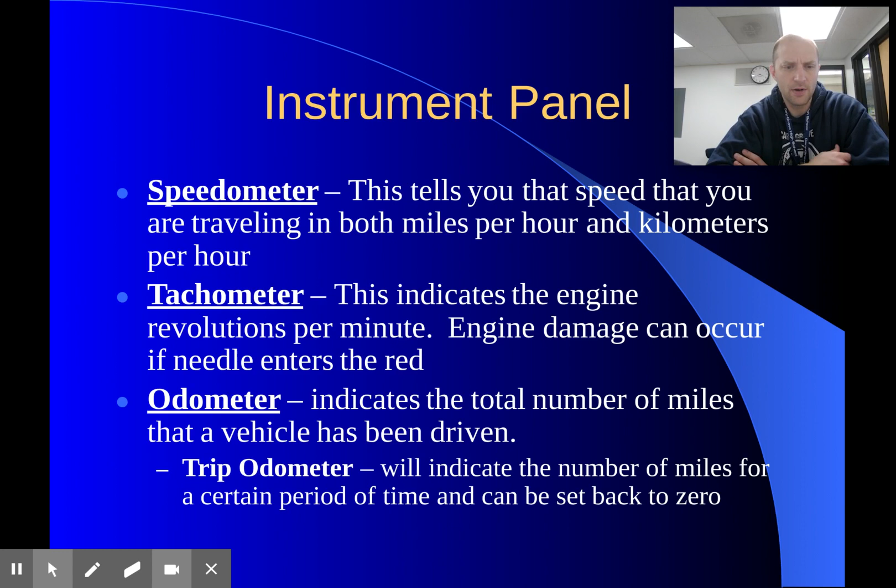Fuel gauge, you guys know, keep the fuel gauge up. If you look at the fuel gauge, you'll notice there's a little arrow there, and that tells you where the gas cap is. So if you're trying to fill up, take a look at the arrow. I'll show you in one of the next slides here.

The temperature gauge light warns you when the coolant in the engine is running too hot. If you have a leak of some sort, you might see your temperature gauge getting into the red zone, and that is bad. If you see that, you want to turn your engine off, or at the very least turn your heater on, and that's going to help expel some of the heat out of the engine compartment.

The oil pressure gauge light warns you when there's not enough oil circulating at the proper pressure. Usually that's because your car might be older and it's burning oil, or maybe you're past due for an oil change and you've lost some oil along the way, or maybe you have a leak. So take a look at those gauges. If you see some warning lights, get that fixed right away, because that's going to cost you thousands of dollars if you don't and something goes wrong with the engine.

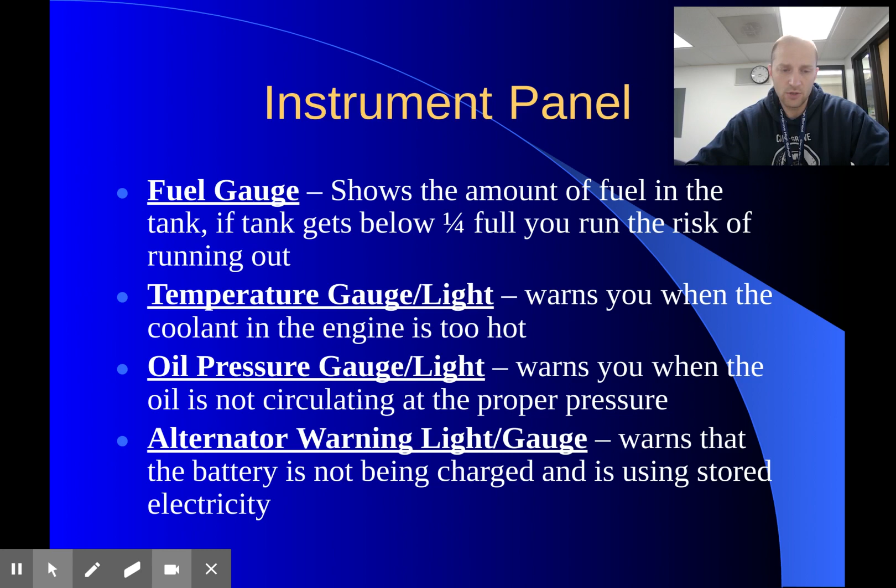The alternator warning light gauge warns that the battery is not being charged and is using stored electricity. Anytime you start your car, that's only with the battery. Once you get the car going, the alternator runs and charges that battery. If there's an issue and it's not being charged, then you're only using the battery, and eventually you're going to run out and have to get your car jumped and get a new battery or new alternator.

Brake system warning light reminds you to release the parking brake and warns you that the braking system isn't working properly. The first thing is, especially when doing uphill and downhill parking, we use the parking brake. If you have a manual transmission or stick shift, we'll talk more about this later.

You always use the parking brake anytime you park to make sure it's secure. The parking brake is located in a few different spots. Sometimes it's on the side console, you press a button and pull up, and you'll see the red brake light go on. Press down and the light goes off, disengaging the parking brake. You might also see one on the left-hand side that you step on to engage it, and step back on harder to disengage it, and the light turns on and off.

There's an anti-lock braking system light that tells you the ABS is working properly. So if you see the ABS light, that's okay, it's just telling you it's working.

The safety belt light reminds us, and we hear that little chime, ding ding ding. That's newer, within the last 20 years or so. That wasn't like my first car, I never had a light or chime saying my seatbelt was on. So this is a newer thing. It gives us a chime that says, hey, put your seatbelt on. It's a nice reminder.

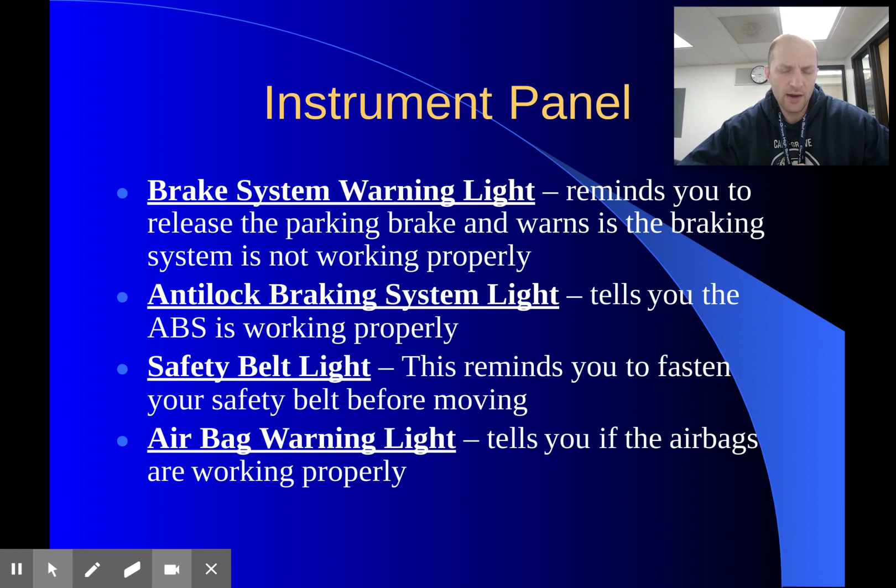And then the airbag warning light tells you if the airbags are working properly.

Turn signals tell you the direction you have to turn the signal. We always know pressing down is the left and pressing up is the right. If you have those on for way too long, usually you'll start hearing chimes, especially like at Three Oaks Road and Route 14 by Thornton's, which is a very shallow turn, not a very sharp turn. So on those shallow turns, sometimes your turn signals do not shut off.

Your high beam indicator is usually a blue light. So when you turn your high beams on, you'll see that blue light glow, telling you your high beams are on. Anytime you're driving towards a car with your high beams on, they can't see, so you want to make sure your low beams are on and your high beams are off.

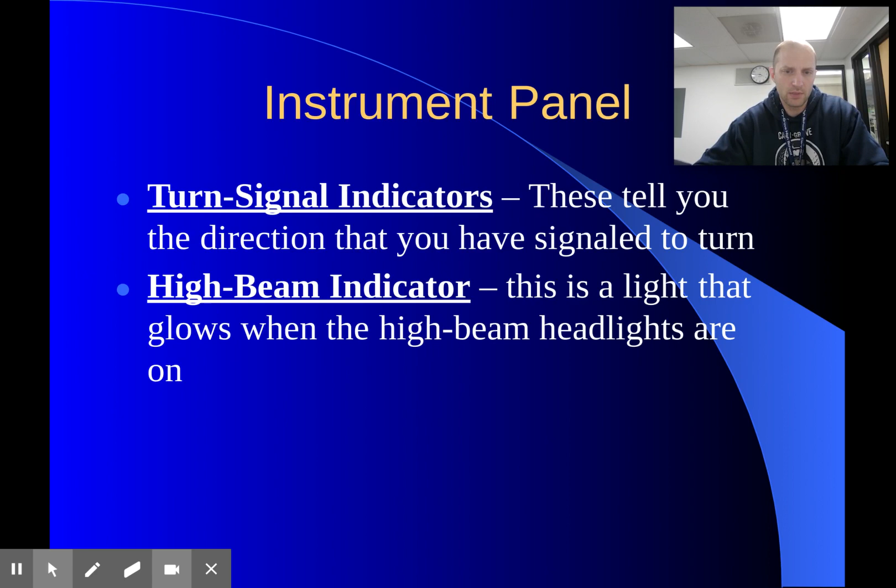So this is just a generic console you can see here. Sometimes they're digital, which is kind of nice. Here we have a tachometer, and here we have a fuel gauge.

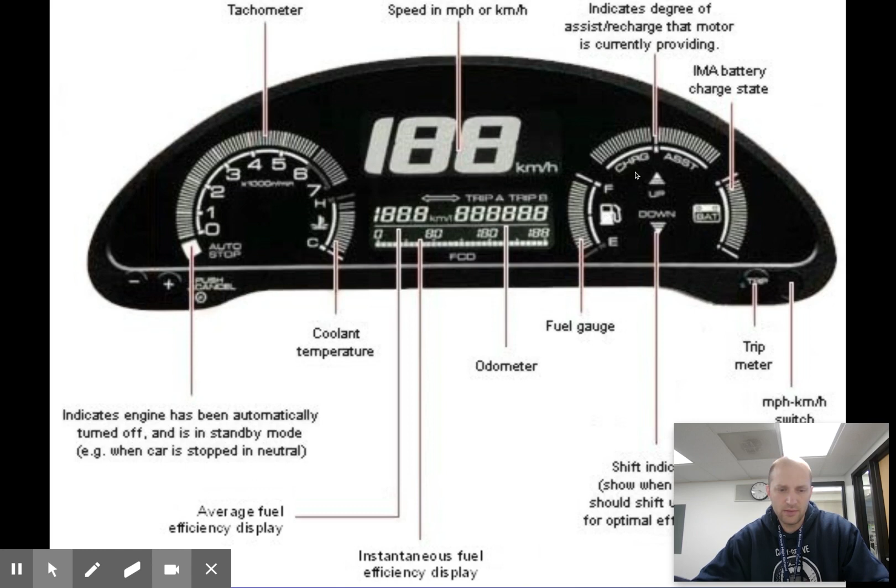The textbook has given us an example to show you the coolant gauge. This is my 2010 Chevy Traverse, it's a little bit older, but it gives you the idea.

Here you see my tripometer, and here is my tachometer. Again, we want those RPMs to be around 4,000, 5,000. If we're getting 6, 7, 8,000, we're really pressing down hard on that engine, and you're going to blow the engine. This is my temperature gauge.

We're going to keep that temperature usually right around 210, which is good. This is my fuel gauge, and you can see that little arrow there by the gas can, telling me my gas tank is on the left, so when I pull up to Thornton's, I know to pull up on the driver's side.

We have our speedometer here. In this case, I just have every 20 miles per hour listed, so every big tick mark is 10, and that's 5, so that's 80, 85, 90, 95, 100.

And these are my gears: park, reverse, neutral, drive, and then L. A lot of people don't know what L is. L is for your low gears, and we'll talk about low gears here in a second.

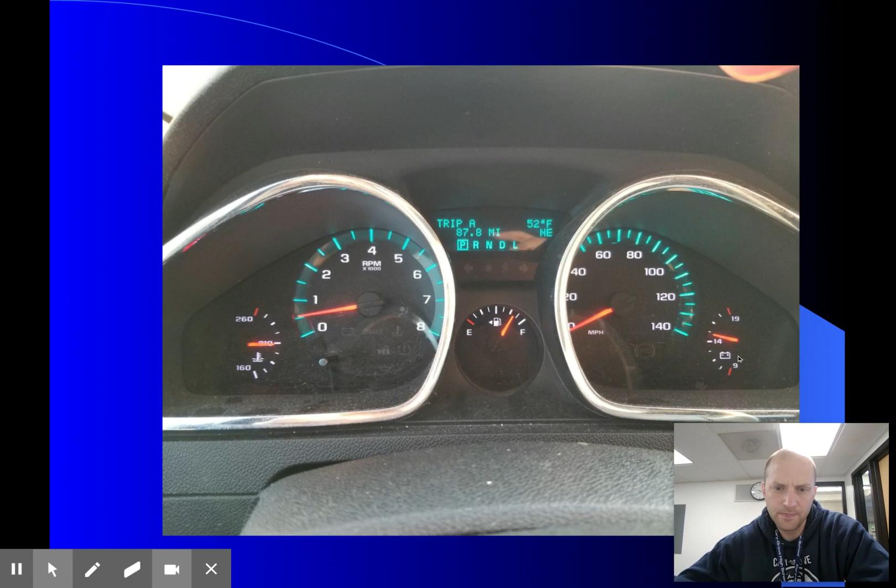This is for my battery, to see that it's charging from my alternator. We know that big round thing in front of me, we should know what that is.

I did have a girl come in and say, what are these pedals down here? Which one's the gas, which one's the brake? She had no idea. And I said, we know what this big round thing is, right? And she said, we know that's a steering wheel. All right, we know how to use that. Make sure when we're using that steering wheel, we're doing little corrections.

We'll talk more about steering in the next few sections. The selector lever in an automatic transmission, that might be, let me move out of the way here.

The gear selector lever location varies for some vehicles. Big trucks and similar vehicles might have it right there on the steering column. Some might have it on the column on the side, or on the center console.

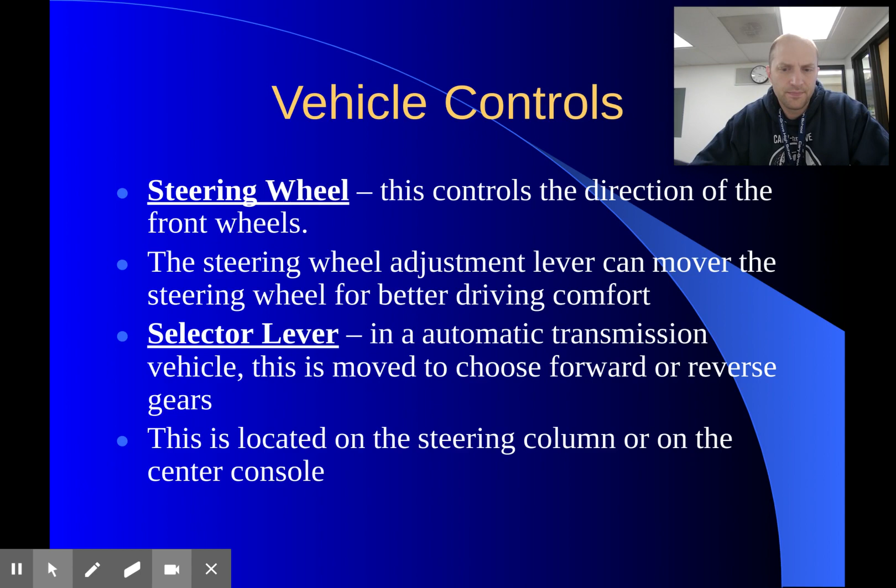The ignition switch is where sometimes we've got to stick keys in and turn it, and sometimes we just press a button.

Cruise control is the device that lets us maintain our desired speed without keeping your foot on the accelerator. We're not going to use this around town, this is for long trips. Maybe you're on the expressway, going from Cary to Florida over spring break, and you've got to be on the road for several hours. You can't just have your foot on the accelerator the whole time, that gets painful after a while.

So when we have enough room around us and there's not a lot of traffic, we go ahead and put that cruise control on, and that's going to maintain our speed. It's really easy to turn off too. All we've got to do is see if cars are starting to slow down, press the brake, and it shuts off the cruise control. It's a good way to maintain your speed, it's good for gas mileage, and it's going to prevent you from going up and down.

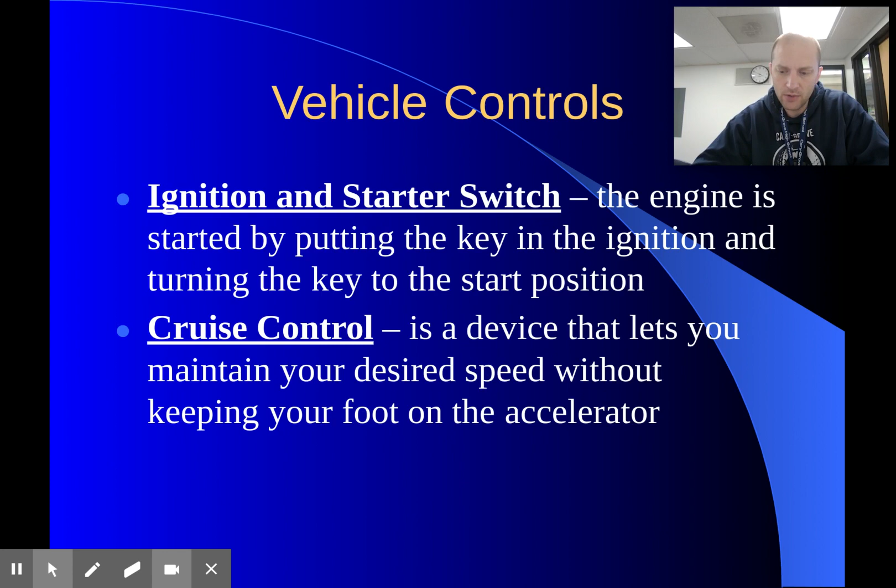Maybe you're not paying attention, all of a sudden you look down and you've been pressing the pedal, and suddenly you're not pressing it hard enough, or you're pressing it too much and you're going 90 instead of 70. So it's nice to maintain your speed, get up to the speed you want to go, and then maintain it. Again, that's really good for your fuel efficiency.

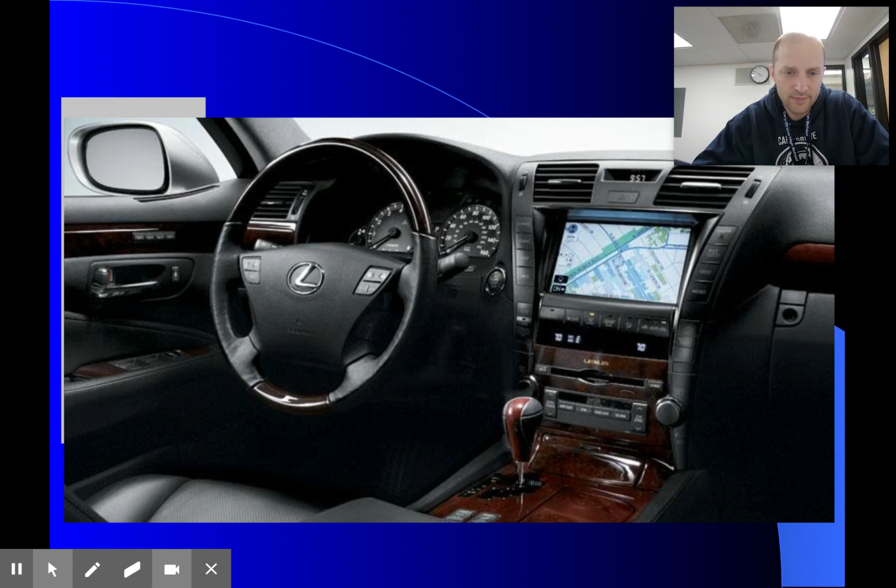Vehicle controls include the parking brake, which keeps the vehicle in place when it's parked. It's located either on the far left of the pedals or the center console. If you have a manual transmission, or what we call a stick shift, you're going to need the clutch pedal, located on the left-hand side of the brake.

We obviously know what the foot brake pedal is, our brake pedal, push this slowly to stop our vehicle. If you ever have to slam on the brakes, we ask you, especially since most of our cars now have ABS, slam on that brake and maintain that pressure. You're going to feel that, that's normal, that's the ABS kicking in. We'll talk more about ABS as we go along.

And then obviously we know the accelerator pedal, pushing this will increase our speed, make us go faster. But be careful, police officers are out there making sure that we are staying within the speed limit.

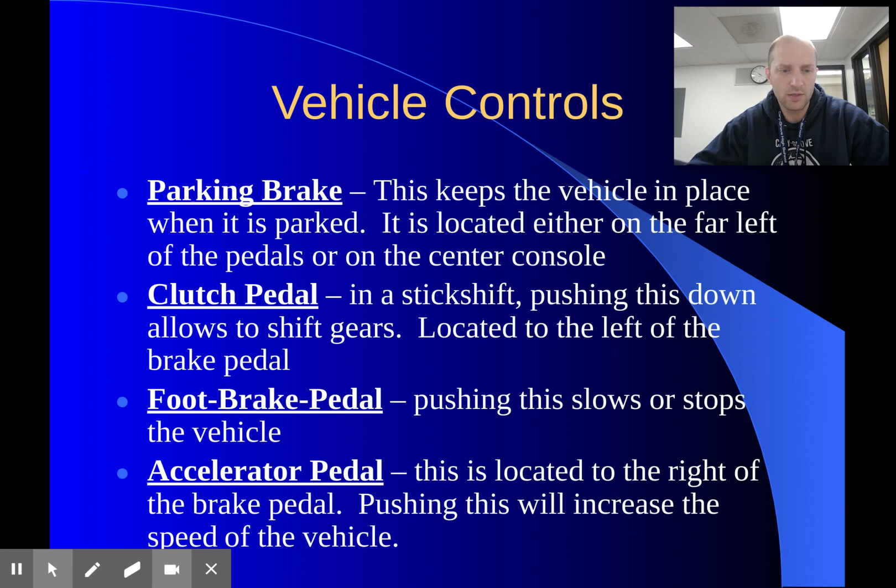Safety belts: always wear that safety belt anytime the vehicle is in motion. A newer thing in the last 40 years is head restraints. Back in the day they would have a chair with no head restraints, and anytime you got in an accident, people would get a lot of whiplash. So the designers of the vehicles noticed that people were having neck issues on even small accidents, so they made the chair go higher so that if you got into an accident, you had support for your neck.

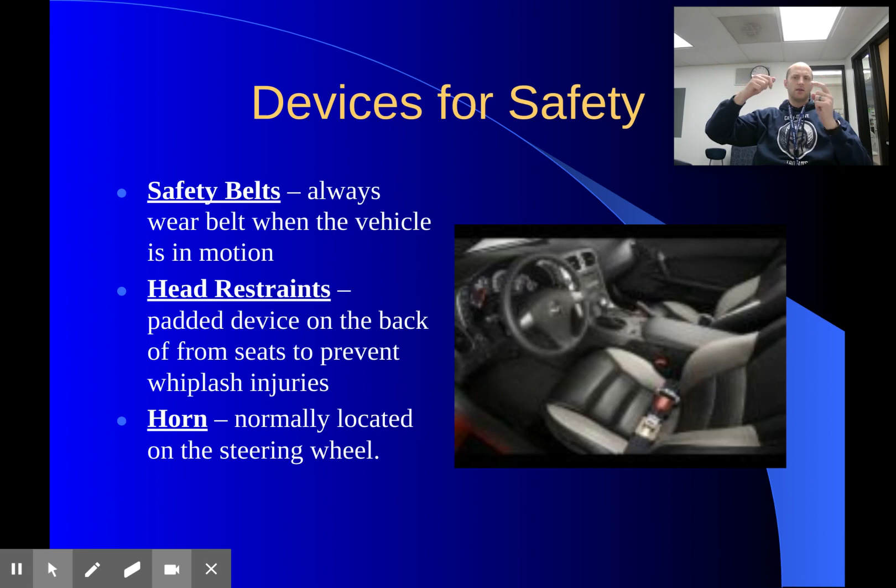One other thing is these head restraints do come out, guys. You'll see these metal prongs, and anytime you need to, you could use them to smash your window to get out of, say, a sinking car. We'll talk more about that in chapter 14.

You guys obviously know what the horn is, press the horn and it gives you a little sound. It's located on the steering wheel. You can use the horn a few different ways: you can be the mean guy and lay on it, or you can be the nice guy and go honk honk, a little double tap.

That's just a nice little, hey, I'm here, versus the big honk. Not so nice.

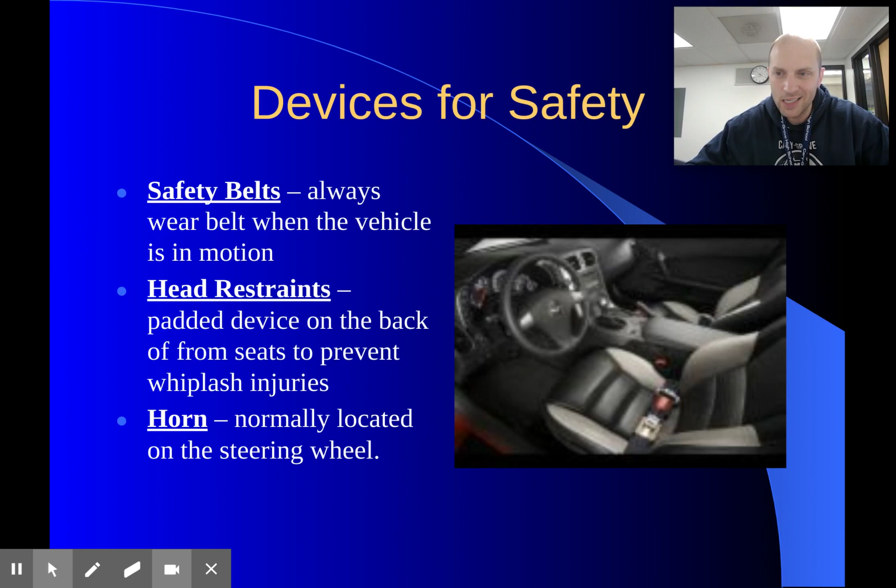We have mirrors on our car so we can see around us the best we can. We have the inside mirror, which shows directly behind the vehicle, and the outside mirrors. Our mirrors are there to help us, but they're not the only thing we can use. We have to make sure they're adjusted to help us see around the best that we can, but know that there are blind spots, and we have to make our shoulder checks from time to time to make sure those are open.

We'll talk more about signaling, checking our mirrors, and checking our blind spots anytime we're changing lanes or moving out of a parking spot.

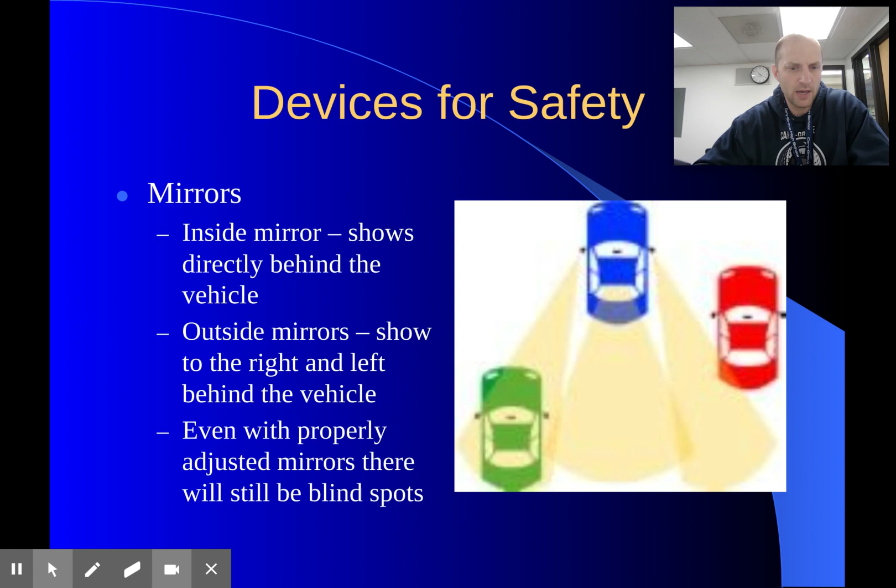There are some outside checks we've got to do before we get ready to drive. Anytime you're approaching your vehicle and getting ready to get in, we strongly suggest you walk around the vehicle and make sure there's no issues. Double check underneath that you're not leaking any oil, make sure your four tires are inflated, and make sure the wheels are pointed straight. You don't want to pull out and all of a sudden find yourself running over the curb. That would be crazy.

Make sure there's nothing on your windshield wipers, and make sure your headlights are in good working order. Especially this time of year, in wintertime, you want to make sure your headlights and brake lights are not covered with snow. We want to make sure those are clear.

Also, ladies, I've seen on Facebook that you should be careful with these predators out there kidnapping women and so on. One of the things they do is put stuff on your windshield wipers, so you always want to make sure those are clear before you start driving. People start driving, get out of their car to check, and somebody's right behind them and takes them. So be aware of that stuff. I've never seen it, but Facebook says it's out there.

So be careful. Now let's do some inside checks. As we're getting ready to drive, we've looked around our vehicle. Now we get on the inside, and we have to be prepared to drive.

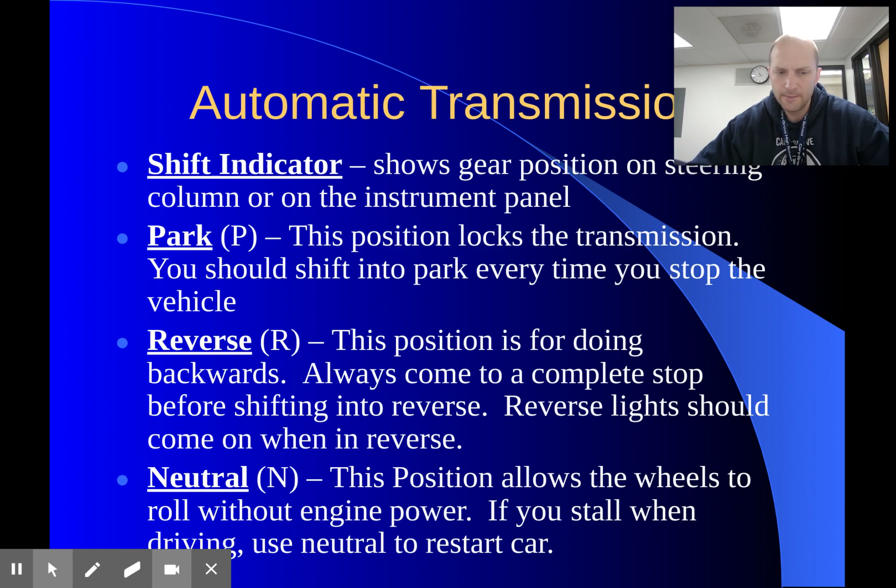Now, some shifters. A lot of us know what these are. P is for park, anytime we're parking the car. R is not because you're a pirate, it's because we want you to reverse, so we go backwards. N is for neutral, so there's no driving power and no engine power, meaning your car will move forward or backward if you're on a hill. And D is for drive. Anytime you guys are shifting, make sure your foot is on the brake before you shift out of park.

Anytime you shift into reverse or drive and let your foot off the brake, you will either go backwards if you're in reverse, or slowly go forward if you're in drive. So we want to make sure our vehicle is not moving while we're shifting. If you put it in reverse and let your foot off the brake, it will start going backwards. And if you put it in drive and let your foot off the brake, it will slowly start going forward. Be aware of that.

The last one is low position, your low gears. You have L1, L2, and these positions allow the engine to send more power to the wheels at lower speeds. This is really good if you have a big trailer behind you, maybe you're hauling a boat or a camper, and you need to get going off the line with a heavy load behind you, or maybe you're moving. You want to put it in the low gears, and that's going to get the car moving a little easier, putting more power to those wheels without spinning them.

Also, maybe you're in the snow and you're having trouble getting going. Put it in a low gear, that should help you out.

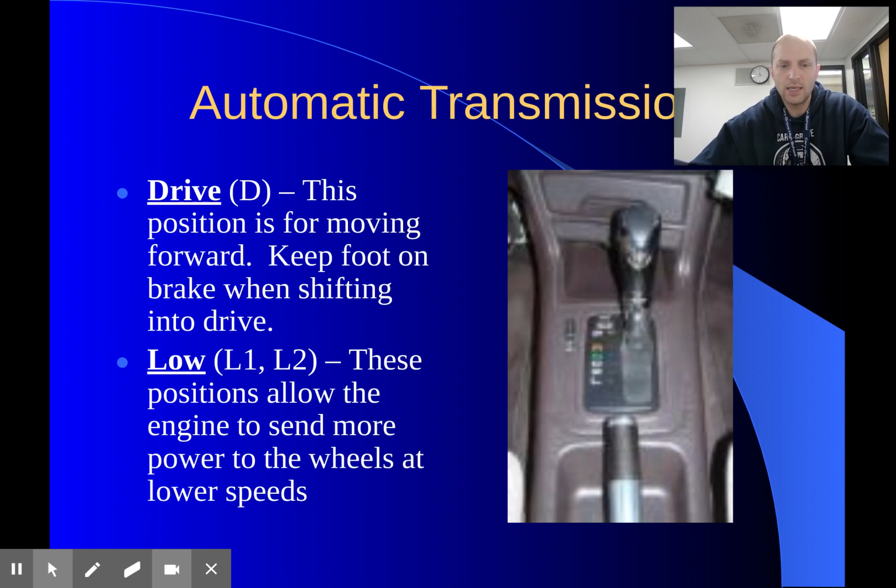The other reason why you'd use the low gears is maybe you're in Colorado with all these mountains. If you're going down a really steep grade, what you don't want to do is be riding the brake the whole way down. Eventually those brake pads are going to be rubbing up against those cylinders, those calipers are going to be squeezing, creating friction, and eventually those pads are going to get so hot and greasy they're not going to be working. It's called brake fade. So one of the things you can do is engine braking, using your engine to slow you down. You can go from drive to your lower gears, and that will slow you down using the engine. That's why we use the L's for low gears.

Our steering wheel, make sure you're in a comfortable position. We talk about 9 and 3 off to the side. Mom and dad maybe learned 10 and 2, but mom and dad maybe learned on something that didn't have an airbag. If you put your hands up at 10 and 2 and the airbag goes off, now you're punching yourself in the face. Versus 9 and 3, the airbag goes off and your hands aren't going right into your face, giving you big black eyes. So nowadays, if you look at the wheel, at 9 and 3 they usually put nice little cushy areas for you to put your thumbs in.

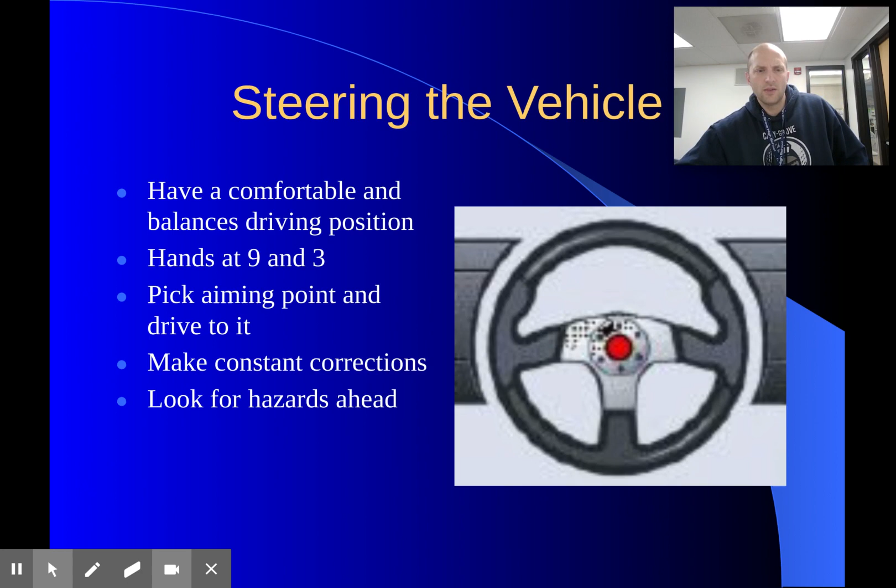Talk about steering the vehicle, have an aiming point. Make constant corrections, little corrections, not big corrections, or you'll get the car swaying back and forth. Again, look ahead, have an aiming point, and watch out for hazards.

So putting the vehicle in motion, most of us have done this before, so this is nothing new. Press firmly on the brake, anytime you're shifting. Shift the vehicle into drive, turn your signal on, check traffic in your rear view mirrors, and look over your left shoulder. You hear me say SMB: signal, mirror, blind spot. When the roadway is clear, release the brake and gently press on the accelerator, moving away from the side of the road. So we signal, check our mirrors, check our blind spot, make sure it's safe, and gently get into traffic.

Once you're driving, you're probably going to have to cancel your signal because it won't shut off automatically, so you just touch it and it will turn off. Then once you reach your desired speed, let up on the accelerator.

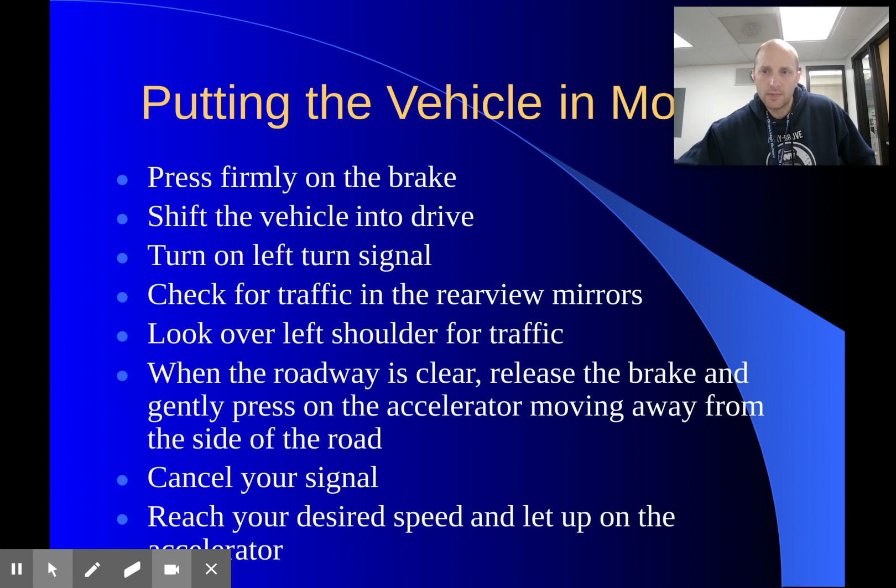When you're stopping the vehicle, check traffic in your mirrors. Anytime I press the brake, I'm always curious about the people behind me, are they looking like they're braking? If I'm braking and I check my mirror and they're not stopping, one thing you can do is double tap your brake and that will put your brake lights on.

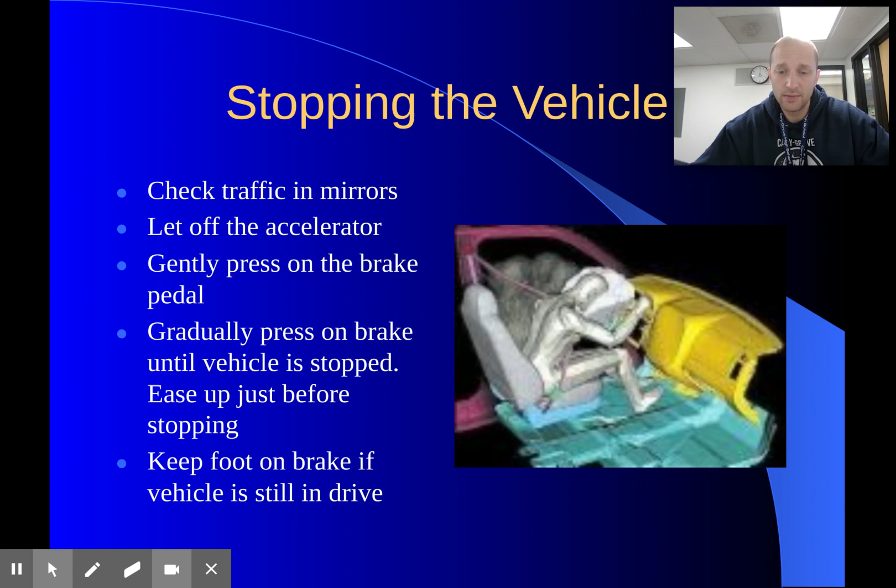Gently press on the brake pedal, gradually press until the vehicle is stopped, and ease up just before stopping. You don't want it to be abrupt. Sometimes you have to feather it, get down low, let off, and then get back on it, and that's going to help the momentum in the car slow down a little bit so you're not making Mr. Gears throw up. Keep your foot on the brake if the vehicle is still in drive. Again, if you let off the brake, the vehicle will start moving again, so keep your foot on the brake.

Driving a manual transmission, a lot of you guys have never done this before. Some of you have never driven a regular car, so the chances of you driving a manual is probably slim. But if you ever have the opportunity, I strongly suggest that you learn. Manual transmission is also known as what we call stick shift, requiring us to manually move from one gear to the next.

You want to make sure your parking brake is set. Always make sure that you set your parking brake with a manual transmission vehicle. If you put this into park and don't put it into gear, that thing is going to move on you. So we want to secure it a few different ways: we put it into gear, then we put our parking brake, because if it gets out of gear, it will start rolling on you.

You must learn how to coordinate using the clutch with the accelerator and gear shifter. So you have to use those three things. There's a friction point - this is where you feel the engine take hold and start moving your vehicle. That's with your clutch.

So you're going to put the clutch in, put it into first gear, and then gently let off the clutch. At some point you're going to start feeling the car friction - that's what we call the friction point - and the car's going to start moving. At that point, I put on my right foot and press the gas to propel the car faster. If I don't press on the gas and let off the clutch completely, the car will stall. There's definitely a certain way to do this, and you have to get the experience to do it.

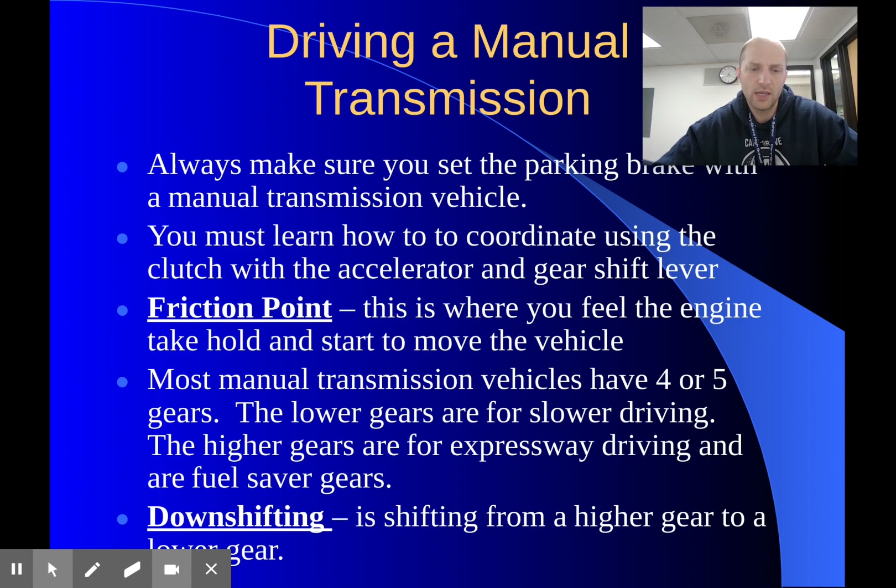So this is a basic idea of what the transmission looks like: first, second, third, fourth, and fifth. We'd only use reverse if the car is stopped, and so on.

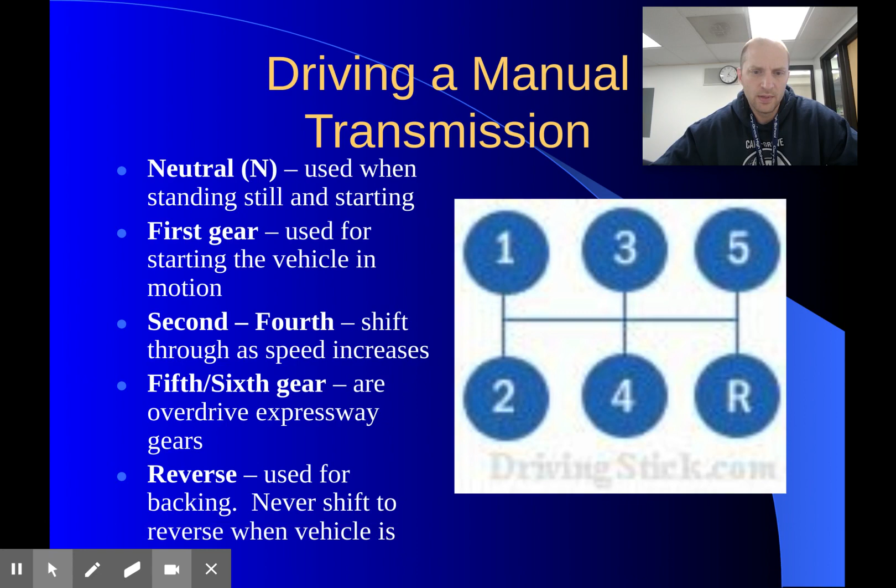Using a clutch, always press the pedal to the floor before starting the engine, before shifting, and before coming to a stop. There's a very distinct smell if you're riding the clutch, and that means you're resting your foot on the clutch. This is bad and will cause wear and tear on your clutch - your clutch will actually start burning. It's very expensive to replace, costing a few thousand dollars each, so you want those to last as long as possible. Don't keep your foot on the clutch pedal.